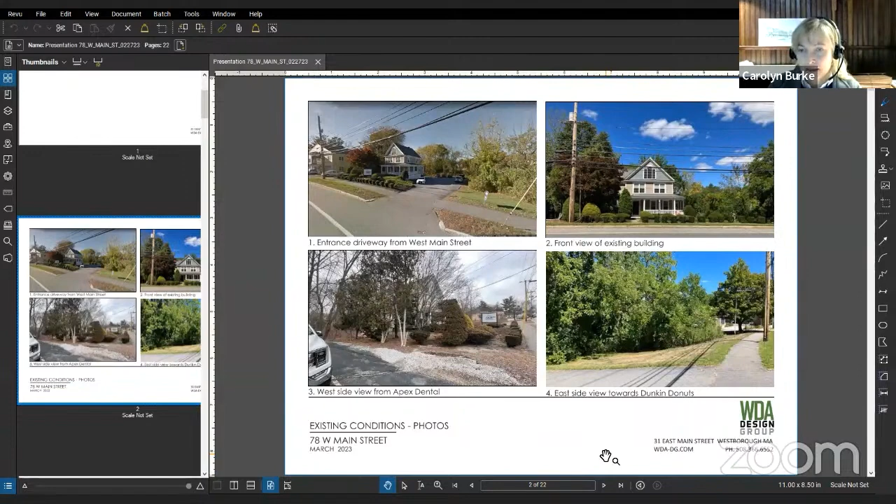I'd like to start with some existing photos as a refresher. One is the entrance drive from West Main Street. Two, the front view of the existing building. Three is the west side view from Apex Dental. Four, east side view towards Dunkin' Donuts. Fifth is the landscape view along the east property line. Six is the east elevation of the existing building.

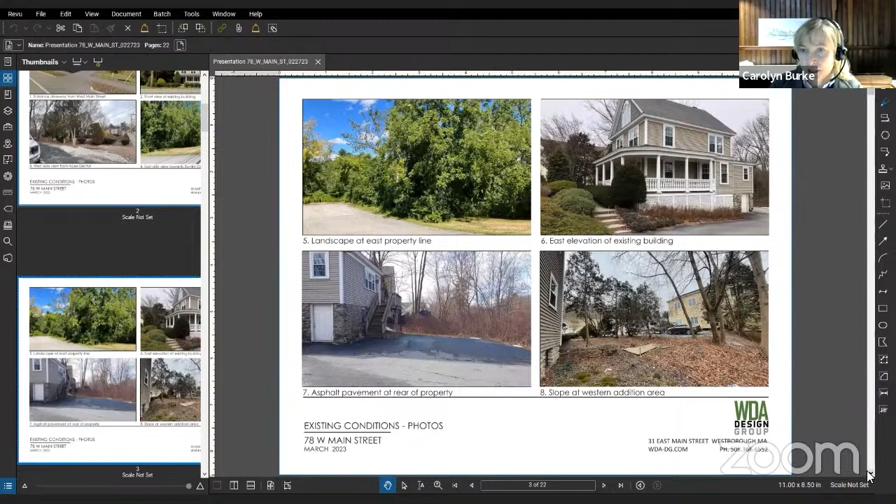Seven is the asphalt pavement at the rear of the property. Eight, the slope at the western addition area. Nine is the landscape at the rear of the property, and ten, similarly, at the rear of the property. Eleven is the view from the driveway at Dunkin' Donuts. This is our existing conditions of the building, showing the large parking area, the wetland area, and the vegetation.

And our proposed plan. On our proposed plan, we have improved the aesthetics of the rain garden, the shallow basin. We've created a rain garden, and we've added screening along the west side of the property line at Apex Dental. That screening consists of arborvitae and yew shrubs. And then in the lower area of the slope, we have some viburnum.

To address the letter responses, we have updated the zoning classification table to reflect the correct zoning. We have updated our photometric plan to eliminate spillover onto the Dunkin' Donuts area. We will request a waiver for a variance of the width of the buffer area along the east side. We've adjusted the planting plan to show tree height at a minimum of 6 feet tall.

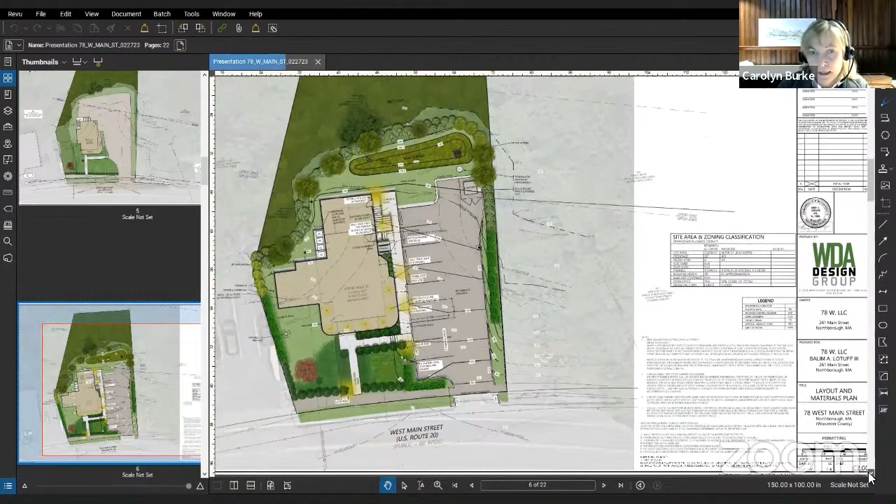We have revised our planting plan, and I'll show you some examples of the plants included in our rain garden. It consists of iris, goldenrod, New England aster, boneset, switchgrass, and the shrubs summer sweet and red sprite type of holly.

We've added the erosion control plan to the drawing set, and we've adjusted the location of the dumpster, setting it back a foot and towards the property line a foot. We've added the enclosure for the dumpster, and we've added the screen planting, as I've mentioned, consisting of arborvitae along the west property line as requested.

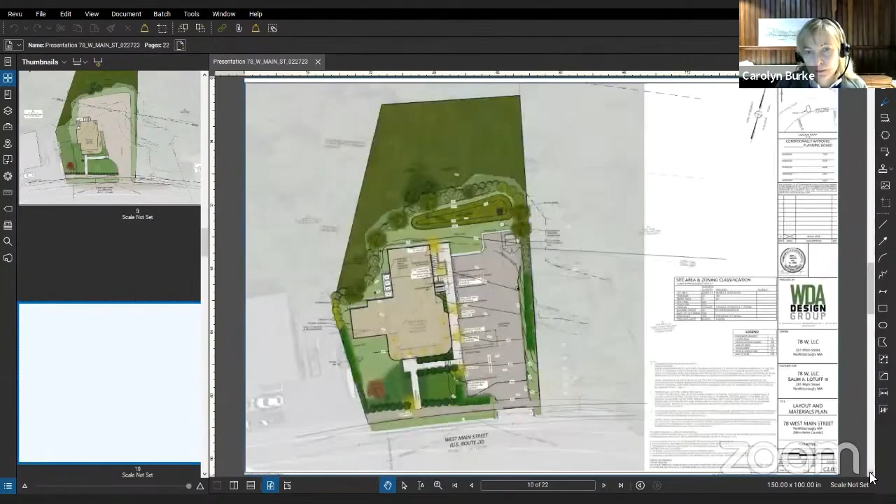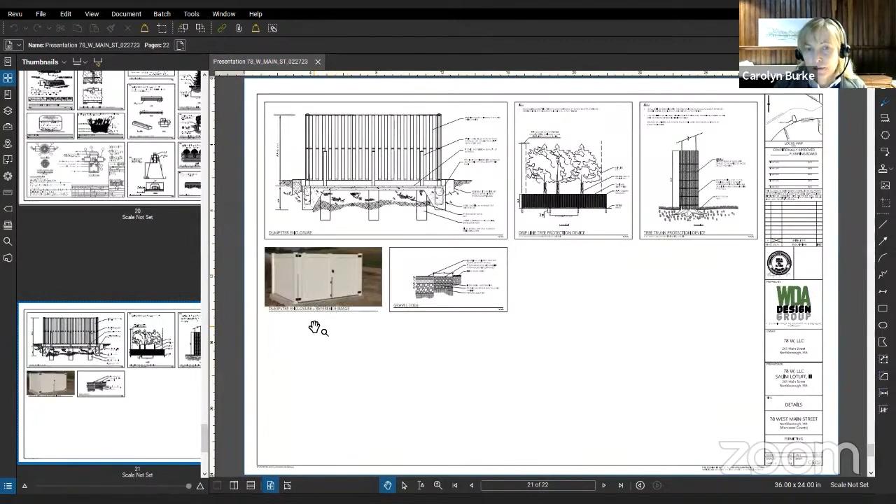And this is the updated planting plan. This is a picture of the proposed style of the dumpster enclosure, and our updated photometric plan.

All right, thank you. Are there some questions and comments? Thank you very much. Lori, that sounds like it covers your letter, your review letter.

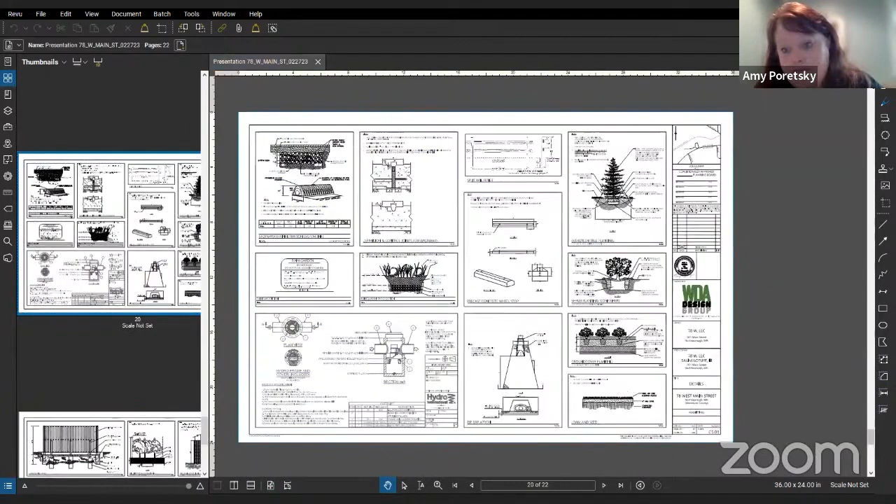Okay, does anybody else have any comments? Any board members? Maybe I do. Sure, Lisa. Okay, it's just a few things probably going back. Can we bring up the photos that you had, number 3, west side view?

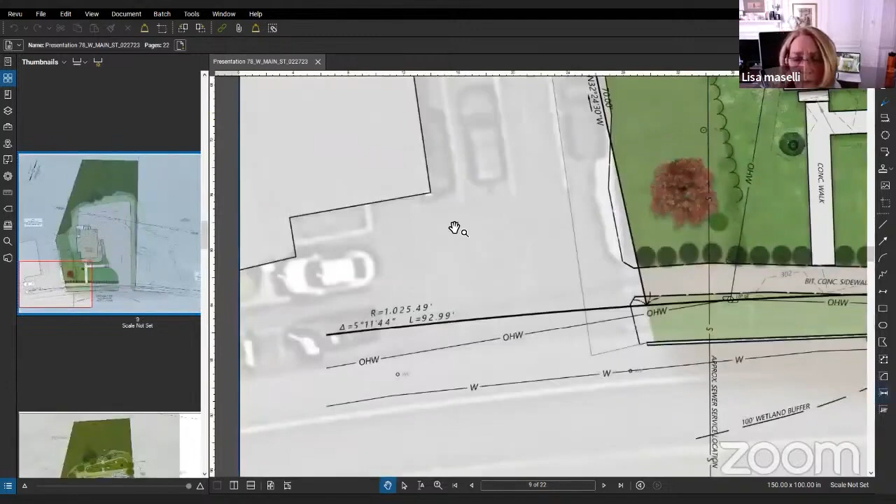It's going to be a couple questions on that, and then yes, right there. So if I'm looking at this, I'm assuming that that's snow. That would make perfect sense if it's a current picture. Is that correct, or is that just stone?

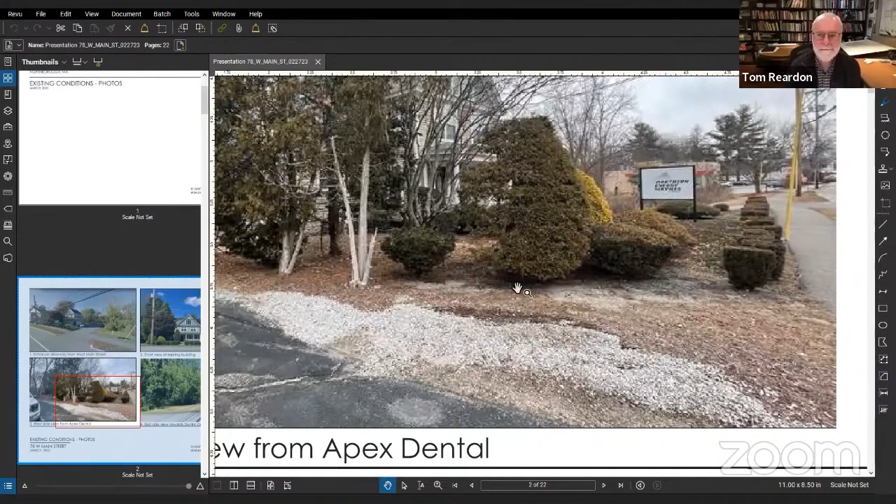Can you hear me? Looks like gravel. It's gravel. That is crushed gravel stone, put in there. Probably a new piece put in, probably to fill something up, I would imagine.

Yep. Landscaping - so just get rid of all that and do the grading, even the tree lines, check the tree lines because it's all wooded. Yeah, so get rid of all that. And then this side.

Did somebody mute themselves?

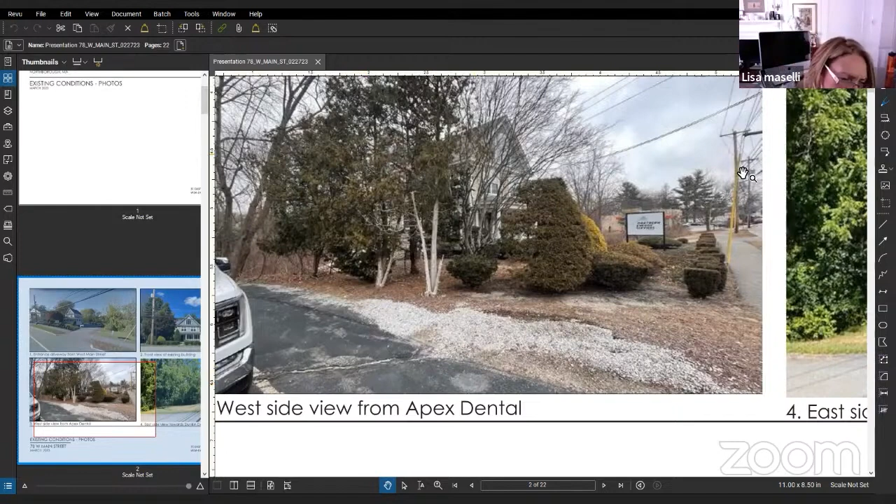Okay, so yes, this is gravel along the driveway at the Apex side. All right, so my comment starts with, because you're going to have such a close addition to this lot line, which shows pretty well here because it goes right up to that, the pavement, does it not? No, it's about 10, 15 feet away from the existing paving.

Okay, then, well, the lot line that we saw in the plan showed that there was kind of a combination of stepping over from both sides, probably to the lower right of this photograph. And that, yeah, come down to the, well, more the street side, let's call it the street side. Yes, down through there. So when looking back at the plans, that lot line seems to intermingle between both properties.

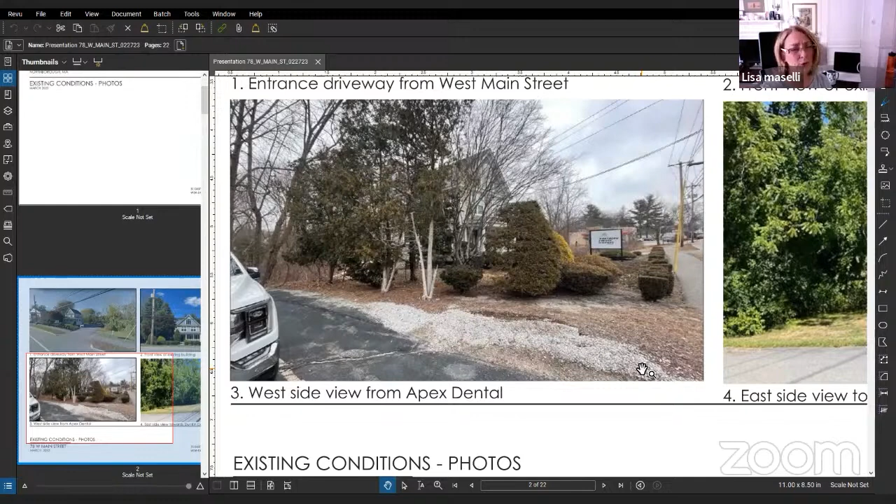And when we were talking about putting in, and I don't know if it drops, is it flush? Is it the same elevation on the driveway and the landscaping area? It is in the front of the building. They are the same elevation, but as soon as you turn the corner and head north, the site drops off 6 to 8 feet to the back of the property.

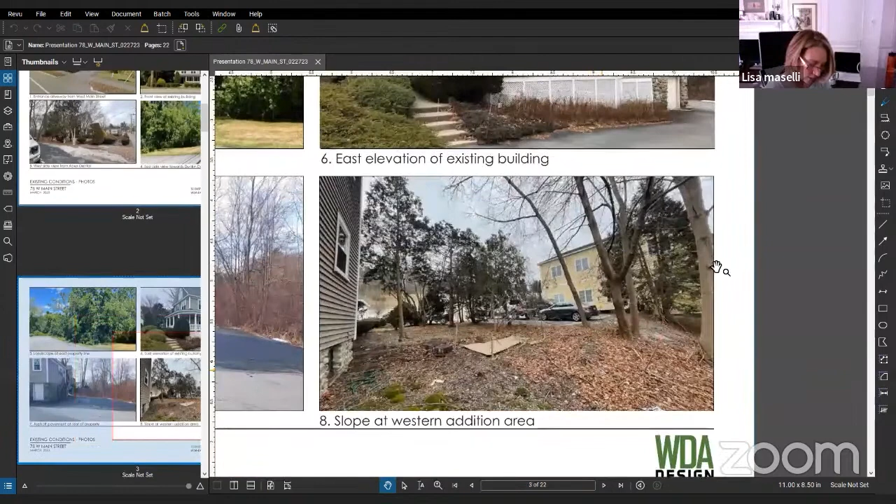Okay, and as it drops off, that's the area that we were actually starting to talk about, how that will affect whoever's living in the house with lights and such from the driveway. How, and for the tree line or for the fence line or whatever, there was concern that the fence would be knocked over with snow removal from Apex and push against it. So

Plantings were put in instead to create some of that buffer. Am I correct? That's correct. And there will be no fence at all in that area. We're proposing to use that, correct.

Arborvitae, yes. So what's the height of the arborvitae that's going to be put in there? 6 feet. It's 6 to 7 feet.

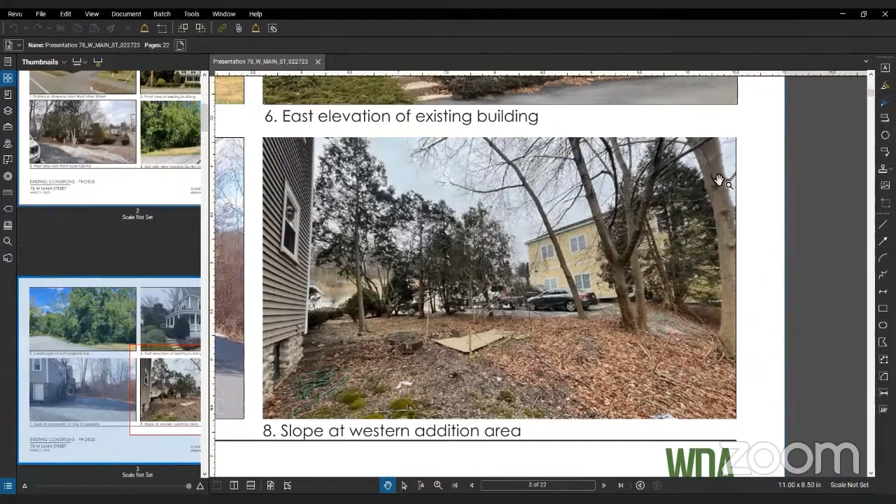And I know it's kind of a crazy question, but again, going to a tree symposium, they were discussing putting in different varieties as opposed to one in a straight line, because some things die and just the look of having some dead and some alive doesn't always please people. So is there a way that you can have a selection, not necessarily just the same arborvitae going down that line, to create just a little bit of safety for life?

So if the goal is to have effective screening, I think that we think the best option is to use a good cultivar that's going to provide screening within this limited space. And we've selected a variety that will do that. To create the screening and the barrier as you have requested, we believe one variety is the way to go. We have a lot of diversity. We have a robust planting plan at this stage throughout the property.

Yes, that's not going to help our lighting at all, though. So,

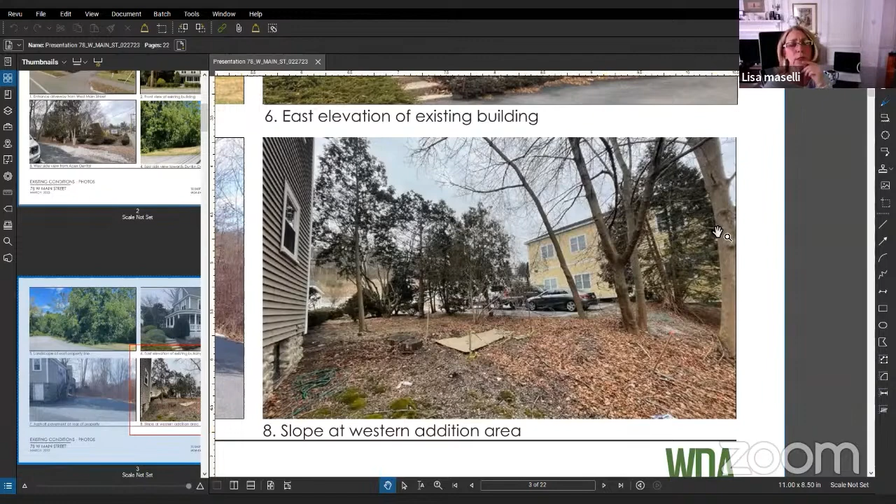So you're saying you're matching it. If I'm looking at your drawing, the darker circles coming—not this one necessarily, but the darker circles that come to the face and to the west going up to the north. Yes. Not that.

Can you show the proposed drawing? There you go, that's the proposed one, yes. So what we're looking at, where it doesn't have circles, that's all arborvitae? This is arborvitae, yes. And then the ones with circles, that's viburnum on the slope.

So in essence, Lisa, they are doing what you're talking about, but the masses you're talking about in that symposium you went to, there's a certain place and time for that. In this case, where they're trying to do screening, that's not the right spot for it. In this situation they're trying to do a screen, and what Carolyn's proposing here is actually correct as far as what they're trying to do.

Well, I'm not questioning that or even the line of it. I'm just saying that sometimes you'll get a row of them and some will die. And I know that there's more than one variety in the family—there's more than one, is there not?

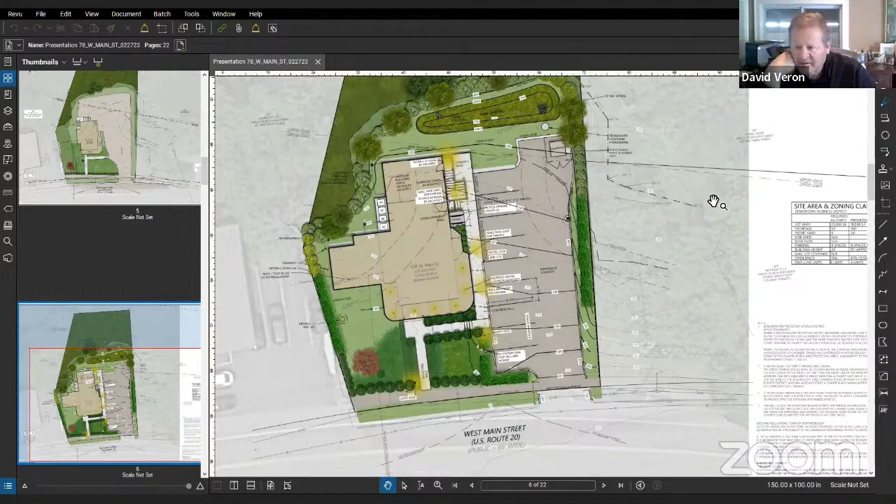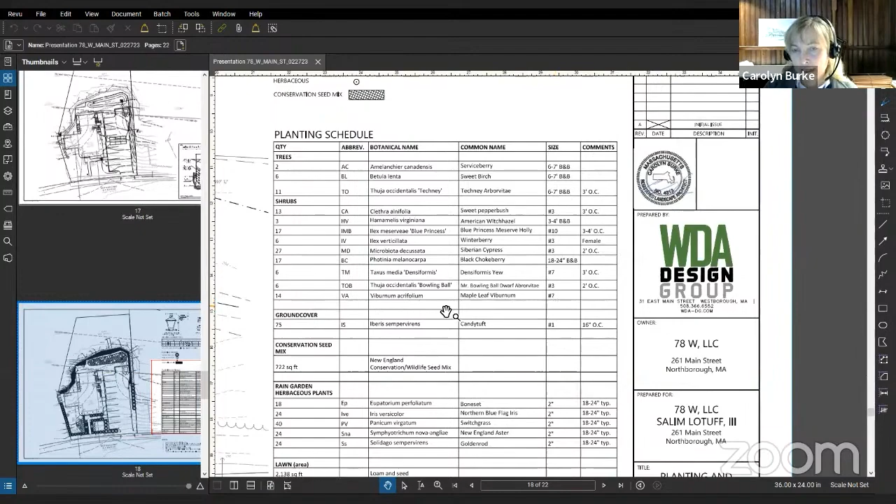Let's flip to the planting plan. Those are 7-gallon. In terms of height, how high—4 feet, 3 feet? So 7-gallon size can really range in height, depending upon what's available to the landscape contractor. But what's the range, from what to what? I would say 3 to 4 feet.

And what do you do about the perpetuity part of that side, that'll have a lot of activity with the driveway next door? How is it going to be?

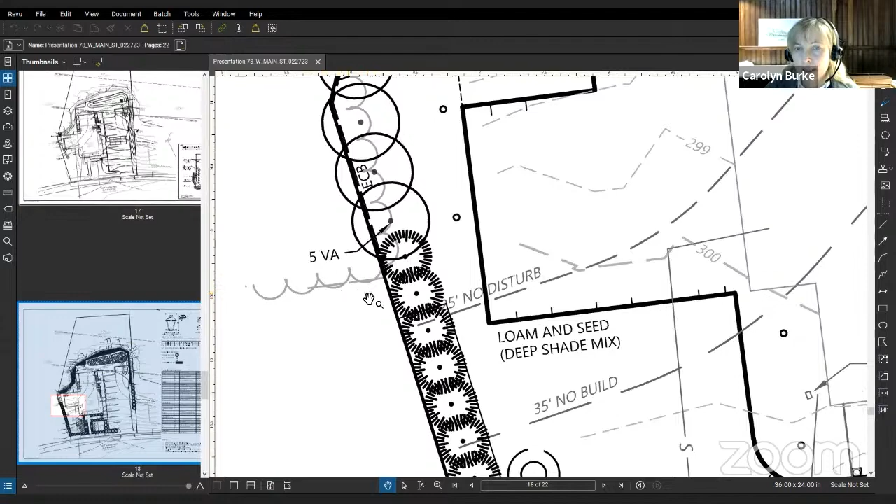So the driveway comes down, you can see here, this is basically the edge of the driveway. The arborvitae is going beyond the edge of the driveway. What's that got to do with perpetuity? I'm sorry, I don't hear you.

Perpetuity is my concern, because you've got a lot of activity that'll be happening in the driveway through the seasons. How are these lines going to be kept in perpetuity and kept up as landscaping goes? I would assume if we're going to put it up there for a buffer, we want to keep it, right?

Yes, well, the proposed viburnum is a native species to this type of environment and is naturalized in these conditions. It will do well on this slope in this condition over a period of time.

I'm sorry, I like those—I'm not talking about those, I was just talking about the arborvitae. Yes, they're difficult to keep up over a course of time. There's a lot of death that happens with them.

There can be a comment or condition added to this special permit granting authority to keep the plantings in perpetuity. There usually is, but we can add that comment. All right, I think that's a great idea.

Could we also have the design review committee observe the planting in perpetuity? Just like the planting has got to exist in perpetuity—I mean, who's going to oversee this?

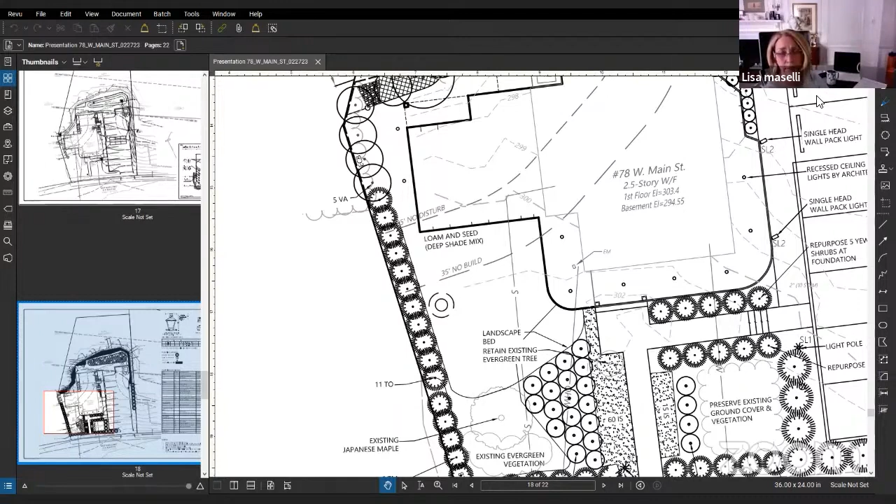But then I think what is proposed is an appropriate screening. If I may, we could just have screening in perpetuity and in proper condition. Right, because they could go back with a fence. Yeah, Bob's got this figured out. If I may—sure.

It's in the bylaws, in more than one place, that when a special permit granting authority issues a special permit, the maps and plans, including details like plantings and fences, are required to be maintained in perpetuity. We've had cases where plantings were planted over the course of 30 years, became overgrown, and the property owner removed them. We had to go back and require the property owner replant those trees because they were required as part of the screening plan for that original site plan. So in terms of who monitors it, it becomes a zoning issue, and it's up to the zoning enforcement officer to see that these are maintained.

Thank you. Thank you. Thanks, Bob.

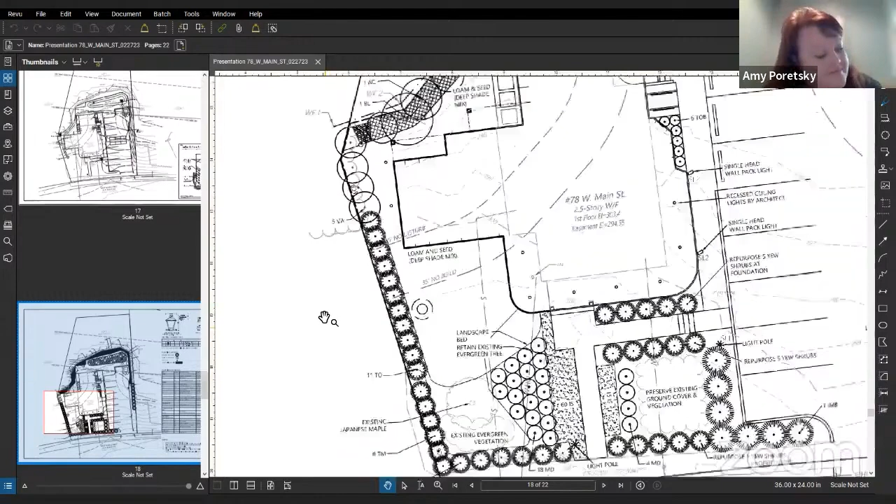Okay, any more questions? Yeah, I have one. Can we go back to the colored site plan, please? I just wanted to make one comment.

Lori is having trouble when she comes off mute, everything's like in stereo and she can't hear anything. So she's watching, but she can't say anything. I just wanted to let people know.

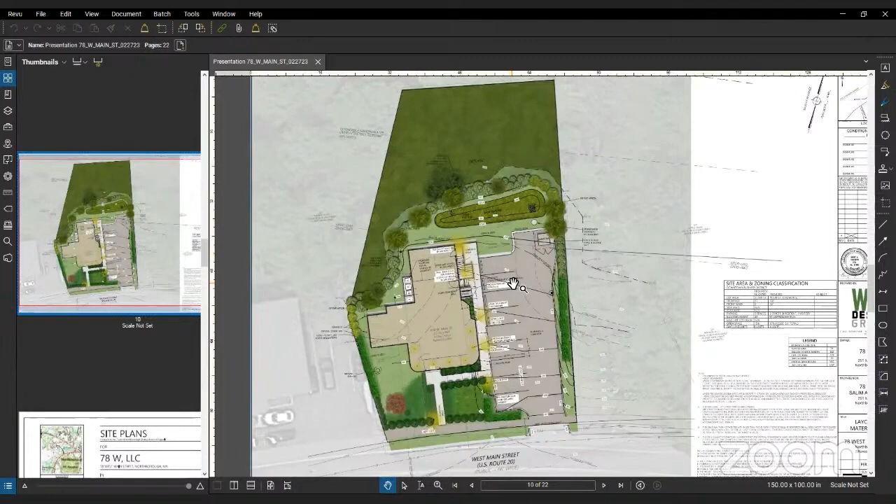So the side yard setbacks are 0, is that correct? Yes. So if Apex decides they want to build right on their property line, what happens to those bedrooms? Is that a fire rated wall? Because we'd be 6 feet from a building? Or would they not be allowed, and this stops them from doing something they want to do in the future? How does that work?

Well, if they built on the property line, we'd still be more than 5 feet from the property line with the proposed addition. We can't predict what Apex might do in the future. Oh, so they would be allowed to do that and everything would comply? Yeah, correct, according to zoning, you can build up to the property line. Right, but I think that's a lot with commercial, when you have bedroom windows needed for egress. I was just curious how that plays out. Well, our proposed addition is more than 5 feet from the existing property line. Okay.

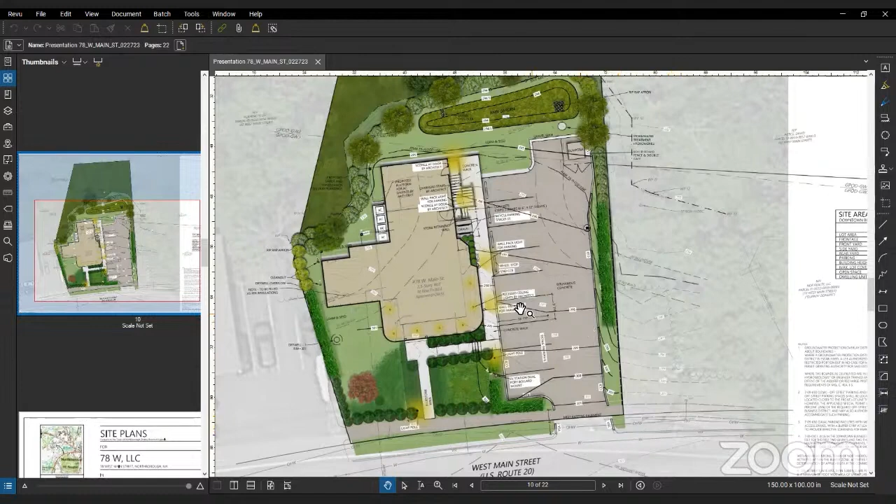And then the other question is, we've got, and I don't know what Bob has, but normally when we have perpendicular parking with 18-foot cars, we have a 24-foot drive aisle. This looks like it's 16, which is shorter than the length of some cars or trucks. How do you back out with only 16 feet behind the car? Well, I think the minimum allowed is 18 for this type of... okay, well, it's 16. I don't know what the dimension is here. Look at the one closest to the road. I scaled it out at 16 feet on the PDF, but you guys can check that if you want. Right there, that space, from the end of that. If that's 18 feet on the stripe, you can see that the space behind it is shorter.

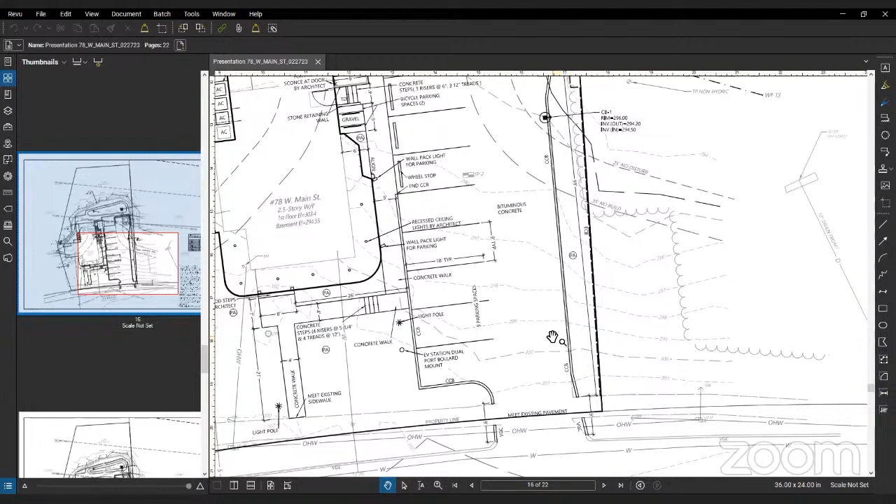And the other question is, if you look at the back 4 spaces, they have tire stops, which is good because they're 2 feet back from the sidewalk so the sidewalk works. But the front 4 spaces don't have tire stops, which means when the car pulls in 2 feet over the sidewalk, you're only going to have maybe 3 feet between the car and the building. It seems really tight, especially when you come in on a curb cut that's maybe 22 feet, and the first thing you hit is the back of the car parked in that space when you enter the site, because the car pops out into the curb cut. I don't know how that works. I've never seen a 16-foot drive aisle with an 18-foot car or parking stall.

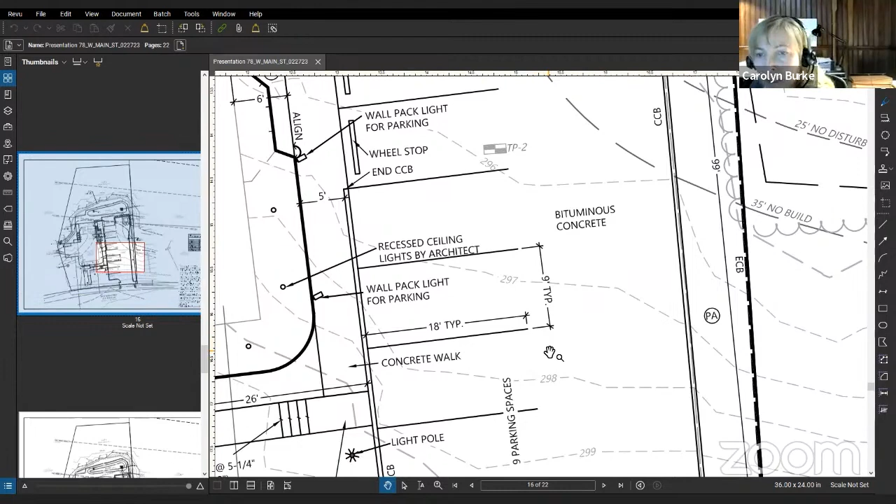Anyway, that's a question, okay, we'll look at that. And then the snow removal, where's that happening? Is that happening in the back? I just wanted to add it. We will look at that dimension, but I believe it is 18 feet backing up. Okay, well, maybe the scale's wrong. Okay, yeah, well, just put a dimension there, as long as we adhere to it, that'd be great. It is 18 feet. So snow removal can occur along the east side, or it can occur in this area between the end of the parking and the rain garden.

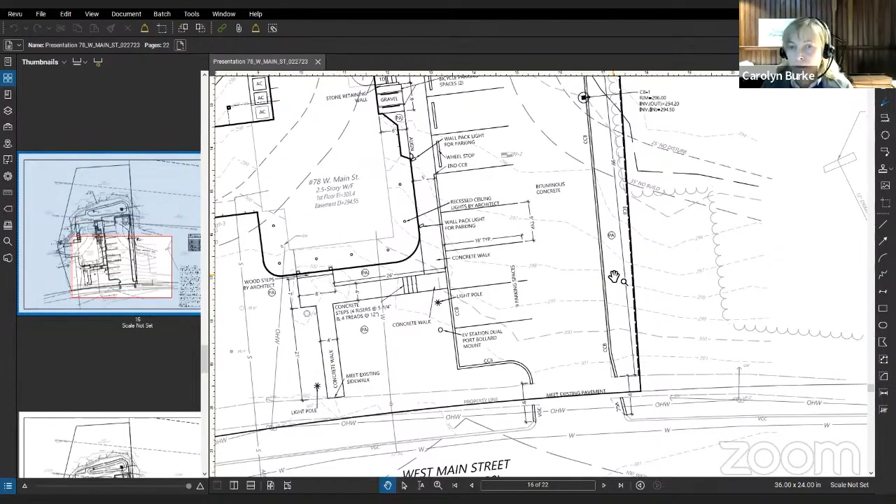Are we planting on the right-hand side? I thought we were planting on the right-hand side. We are not planting in this zone at the front, the zone further where the cursor is shown. Right, but beyond that, we're planting all the way from the second parking stall all the way back. Is that correct? Let's go to the planting plan.

Or just go to the site plan, it's shown there. Everything's kind of there. So yeah, we're planting all the way except for 3 spaces, starting basically at the 4th. So we have this zone, yes, and we have this zone.

So I guess if I'm plowing, and Dave would know better than me, I'm going to push it all to the back. That's the way everything slopes, and then all that salt and sand goes through the rain garden and into the wetlands, because that's the natural terrain.

And then one last question, and I'm not involved in this, but there's a big do-not-disturb zone, and we're building a lot of building in it. Is that just a variance we're getting, or how does that work? Yes, there's a variance. The existing building is in the do-not-build zone, so we are asking for variances and special permits.

Okay, I just wanted to make sure. No, I understand it's pre-existing non-conforming. Usually you're not allowed to worsen those. But okay, that answers my question. I think that's all I got.

Thank you. Okay, I just had some comments. Do we want to come back and double check the driveway calculations, or did she answer your question? Well, when I scaled it, it was 16, but maybe there's a different drawing. Okay, we can put a comment to double check. Just make sure it's 18 minimum and then you're done.

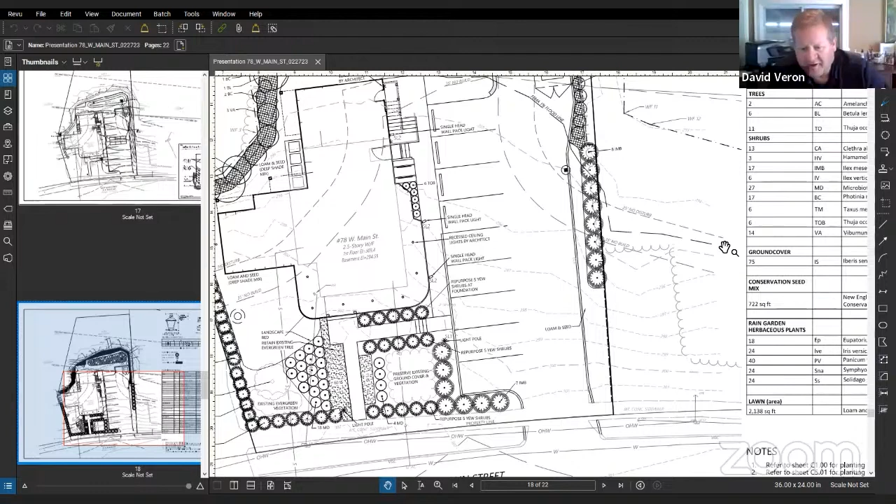All right, to answer your question on the snow: for pushing down and going to the right, there should be enough room to push everything straight down to the left of the dumpster, going towards the rain garden, and any overflow will go right next to the dumpster and to the left of it, along the right-hand side there. Then when the cars are out, they should be able to either push to the left over there or turn around and go back towards the road, probably occupying a little bit of the spot, or the best thing would be again to the left, down towards the rain garden up in there. That would be the spot for this. Yeah, that makes sense.

So in your opinion, you feel there's enough? Yeah, that should do, there's enough. It's just all near the wetlands. That's the only point. You go back a little bit over to the right. But it's a smaller lot than what it was, but it's not huge.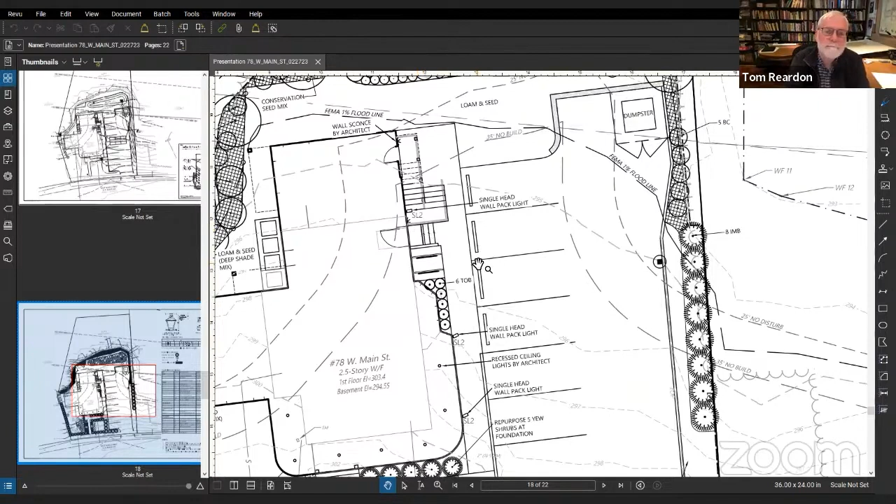The stairs on the floor plans don't match the site plan. I'm not sure which one they're gonna build. If you look at the first floor plan, the stair comes out perpendicular to the back, and on the site plan it's a switchback. Do you know which one is going to be built, Tom? I see that they've moved the platform and made it an L-shaped plan. Either one will work. Probably the site plan gives them more access to the basement level. There's an existing door there shown on the site plan, so I can modify my stair. Okay, thank you.

Any other questions, Dario, on the design? No, I'm fine, thanks. Okay, so we've reviewed the design and we've also gone over the landscaping. Is everybody on board with the landscaping the way it is right now? Sounds like it will be monitored in perpetuity. It sounds like it's a buffer, at least to me, between the house and the business zones next door.

Is everybody ready? We're not going to take an official vote, but we could write a review memo saying that we've reviewed the design and landscape at 78 West Main Street and have no additional comments, unless anyone has a comment they'd like to add to the letter.

I'm fine with all the landscaping. I forget, is a 3-foot sidewalk—does that meet code where the cars would overhang? Or does that not meet code? This is not a 3-foot sidewalk, this is a 5-foot sidewalk, with a 2-foot overhang of a car going over when it hits the curb.

Most cities don't allow that. We just did one in Weston and we did one in Sharon. They said you have to have 4 or 5 foot clear, so we had to have a 7-foot sidewalk because of the 2-foot overhang. People drive their cars till the tires hit the curb, and then it becomes 3 feet usable. I'm not sure what our codes are.

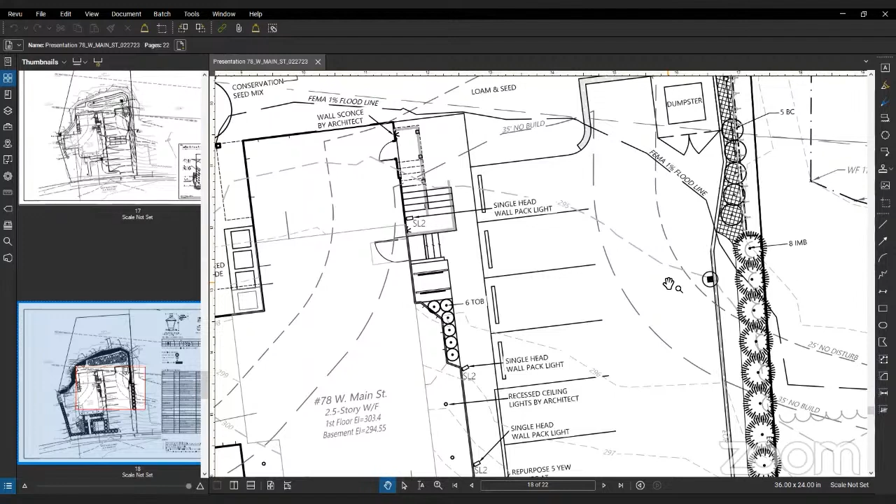Whatever the code is, I don't know. It just seems narrow. Bob may know that, or Tom knows that, whatever it is, or Carolyn would know. Okay, so make sure the sidewalk meets code.

That's all. Should we also have, make sure the driveway access meets code, since there are a couple questions? Well, it should all meet code—hopefully you don't have to state that—but yes, those are things we're looking at that appear that they may not, so I'm just bringing them up. I think erasers are a lot cheaper than jackhammers.

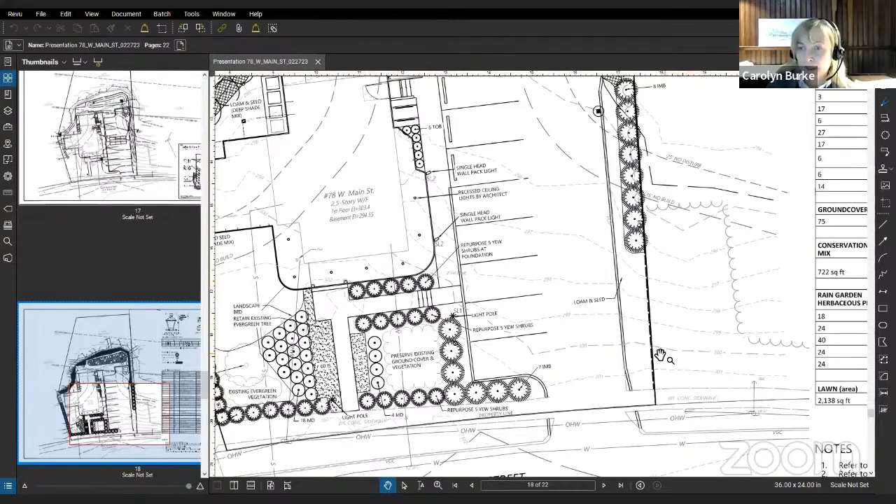Okay, good point. Lori, she's busy, but I just want to make sure someone's going to check that. I'm sure Fred does—Fred is actually on vacation this week. So we are going through site plan review on this, where any of this would be checked.

Okay, is that at ZBA, or who does it? I'm not sure who it's coming in front of, the ZBA or the planning board. We haven't gotten the application yet. Did we actually get an application either? I haven't seen it. The ZBA application has not been submitted yet, but it's been completed. We're going before the ZBA next.

Oh, this is the first time I think we've ever done one without an application at design review. Is that unusual or is that a new standard? My understanding is you could start the process with design review while you're working with the ZBA. But you've been on here longer than I have—have you had that happen before? Well, I believe Lori said we could start the process with the staff and then design review, and do it in conjunction with the application that's being worked on. All right, so it's a new way of doing it. All right, I just wanted to check.

It's my understanding that was the typical process in the past, but I've only been here a year, so I can only attest to what's happened recently. I think it's helpful for applicants to come to design review first, so that by the time they're before the special permit granting authority or the ZBA, they have a project that's further advanced. Well, I like that idea.

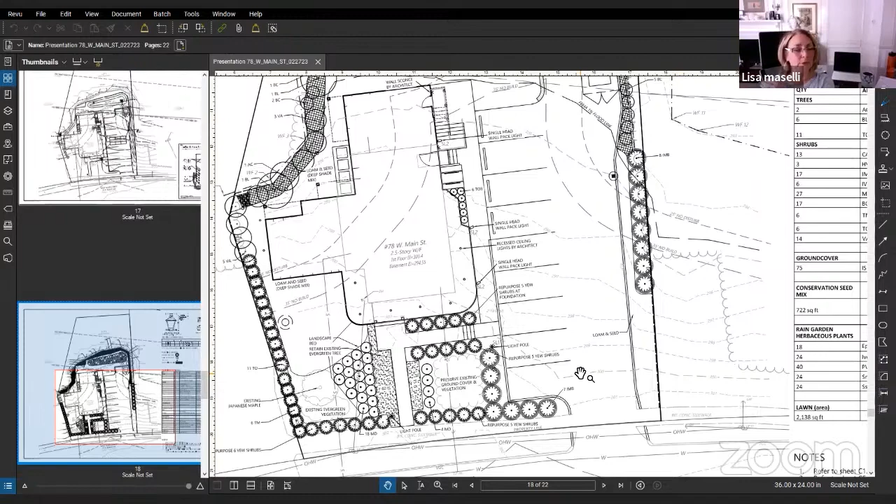Lisa, I think those are great comments and I want to swing back to it, but I just want to close up this application first, and then we'll go back to that so they can move on. But I do think it's great input. Is there anything else for this application that we want to add?

I was going to suggest we write a letter saying we have reviewed the design and landscaping of 78 West Main Street, with a comment about adding sidewalk buffers. Is there anything else we want to add? And check the driveway code, sidewalk width, and the driveway width. Those were the notes I wanted to say.

I'm changing the letters that go forward to say that we've reviewed the design and landscaping, because we don't really approve the whole site plan. In the past, some memos went forward to the special permit granting authority saying that design review approved the site plan, but we don't go into all the aspects of the site plan. So I'd like the letter to say we've reviewed the design of the building and the landscaping.

Does anybody have any comments to add about that? Do you say that it conforms with the design guidelines? I mean, do you make any definitive statement of whether it's consistent with the design review guidelines?

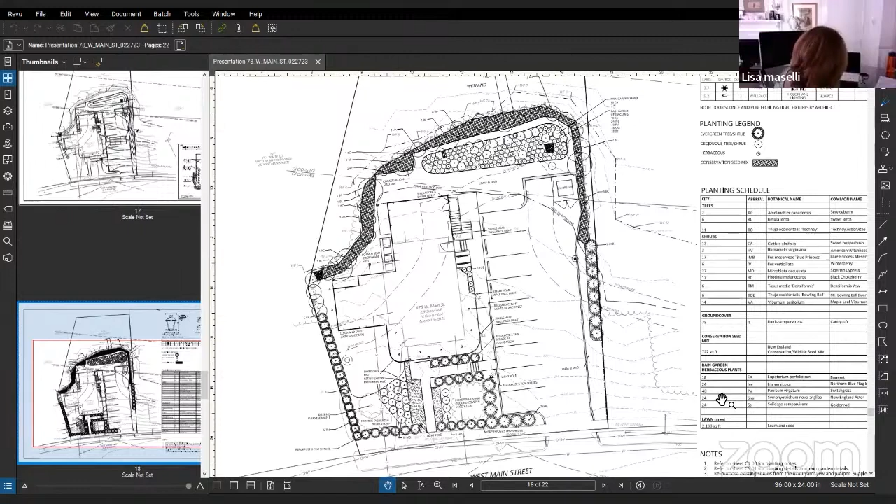So you don't draw any conclusion from your review, you just say you performed the review. Right, correct. And all our questions were addressed in the review and answered. And the review is based on the design guidelines.

Correct? No, you don't implement the design guidelines? I'm trying to understand what you now see your role here and what kind of conclusion you come to, or is it just a process statement. I was making a process statement, but in the future, I'm going to go back and look at all the design review guidelines, but then it's going to get a lot more technical.

I mean, it was a building that was there before. I would think with a new building, we'd go back and review the design review guidelines to make sure it meets all of them. But as it was a current building, since it met the design to begin with, I didn't want to go back to the design review guidelines and say, okay, your windows are too small or you need shutters here or there. I felt that was too detailed since it's just an addition to a building that's already there.

I agree, Amy. Because then you might end up with more than you are looking for, if you have to change your whole design. But like to Lisa's point she was getting at before, there does need to be continuity downtown, and we do need to make sure it all fits the design review guidelines. But for an addition, I didn't think we had to go that route, as long as it matched what was there and met what we were looking for.

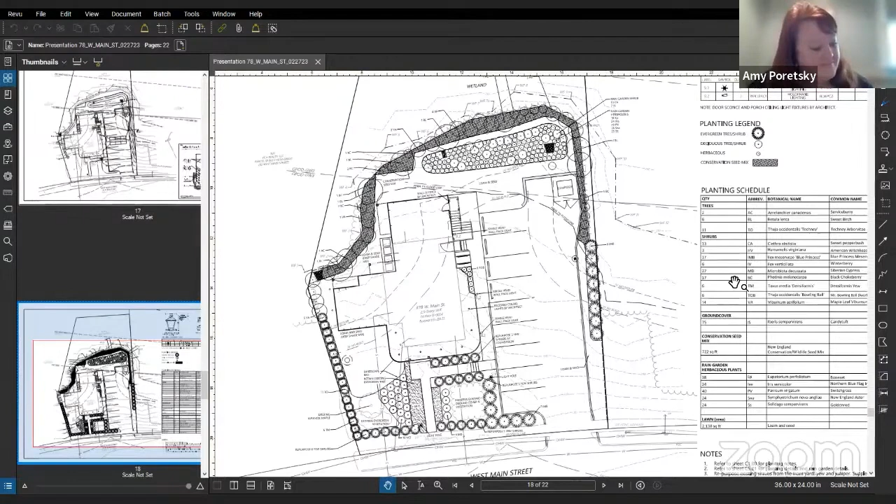Does anybody have anything else to add? Well, I think you're right, I mean, it is about the process. We're not an authority, we're just giving a look at it. Okay, I don't have anything else to add. Okay.

All right, okay, so should we just take a vote that we agree with the letter? And one more thing I did want to add, actually, is I did review the plants in the rain gardens, and 2 of them said they were toxic if someone ingested them. I'm sure everybody's yard has plants that are toxic if ingested. Just if they were a family with kids, it said the boneset and the goldenrod were toxic if ingested, so I didn't know if you wanted to stick with all the others and leave those 2 out, but it's totally up to you.

Should I make a motion? Oh, it's up to you. Does anyone have a comment? I don't think we need to personally. I'm sorry, Lisa, I can't hear you. I don't think we need to vote, I think the letter's fine. Okay, everybody else think the letter's fine? Yes. Dave?

Dave, you're on mute. You can give us a thumbs up if you think it's fine. There we go. This is nuts.

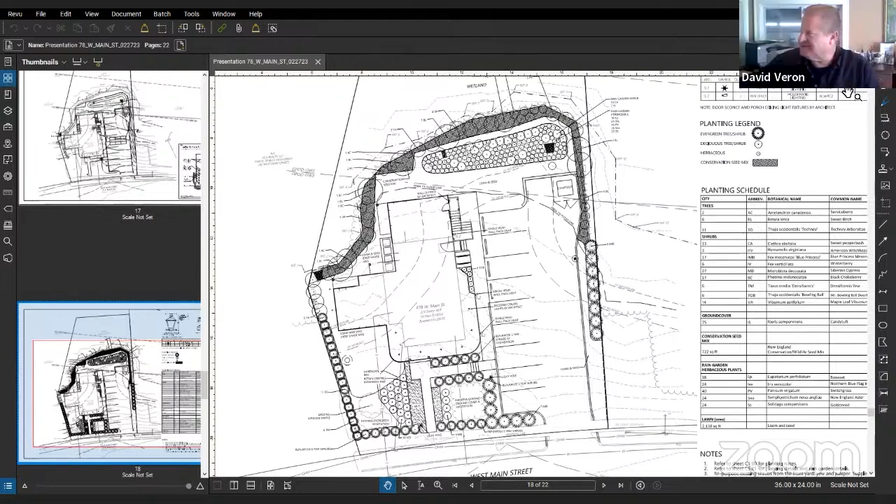Yeah, that's fine. Okay, thanks everybody at 78 West Main Street. Good luck with your next steps. Thank you very much. Thanks for all. Thank you all.

Next on the agenda, I wanted to get to the minutes quickly because I'm not sure we're going to have time for the next application, since we all have to jump off at 10. I just want to make sure we reviewed the September 8th, 2022 minutes.

Does anyone have any more additions? It looks like they added the motion back into the minutes that Dario had made back then for 56 Hudson Street. I double checked it, it looked fine. Does anybody else have any questions on the minutes from September 8th, 2022?

I do not. Dave and Dario, any questions with the minutes? Dario? I don't know if we lost them.

I was on mute that time. I was pretending to be Dave. I'm fine with it, sorry.

Okay, can I have a motion that we approve the September 8th, 2022 minutes? So moved. Is there a second? Dave seconds. All right, this is too much fun. All right, so now we have to vote.

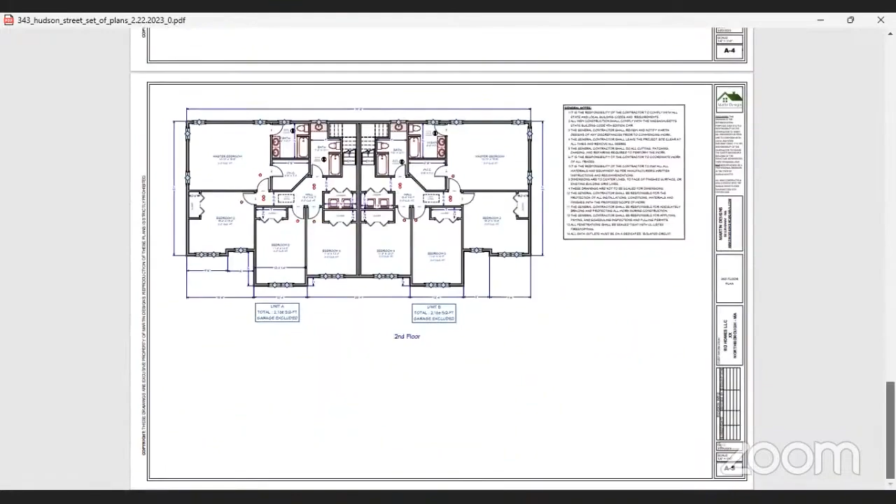Amy, I'm just going to speak for 2 seconds. They gave us a site plan at the end, it's the very last sheet on their submission, so it shows the building being torn down and where this one is being located. The only thing it doesn't show, which would be really simple to show, is the buildings on the 2 adjacent properties. The drawing by Cornerstone shows the existing dwelling, this barely overlaps, but they did give us all that except the actual buildings. They showed all the adjacent lots, they didn't show the buildings, so if you want to see those in context. Most of the stuff is here from what I could see, but I agree that's a pretty simple thing for Cornerstone to do as well.

I agree, Dario. To add on, one of the things we do here is look at the landscape, the fencing, we look at everything overall. We don't do it in pieces, we look at the entire project and how it also looks with the surrounding homes. So we're looking for the whole project as an entirety, and what it's going to look like as a finished product. We don't do piece by piece by piece. It's present everything, and then we go forward from there.

If I can interject, we're planning on coming back before you again. Today the purpose was just to have you take a peek at the building itself, and we do plan to come back one more time. This time when we come back we'll have a representative of Cornerstone with us, and we'll show you more of the area itself, and we'll coordinate between Cornerstone and our architect here. We'll show the landscaping, the fencing, the driveways and so forth.

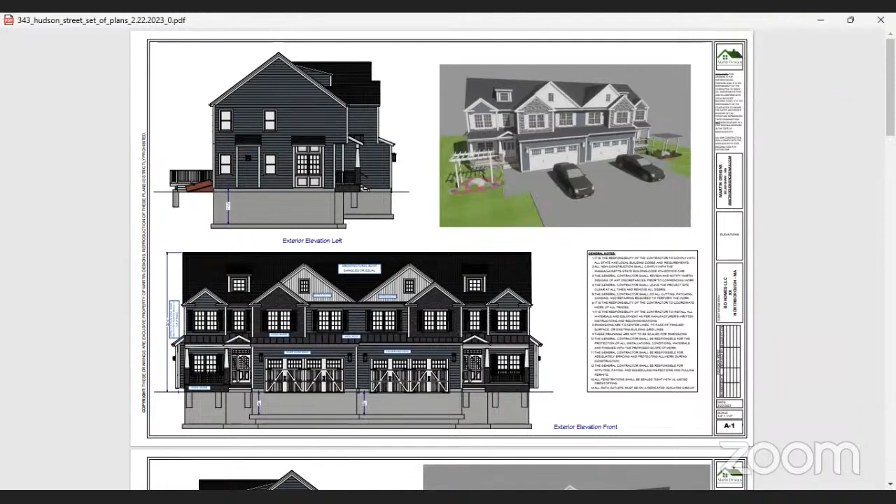Okay, it's 9:53. We're doing good, wow. I just want to, I think Lisa, I said I'd swing back to you, so we have 7 minutes. I didn't want to cut you off with your discussion about downtown. No, I appreciate it.

I find that we keep running out of time and we haven't been able to really discuss stuff. I don't even think we've finalized - has the design review guidelines actually been finalized? Do we actually have a booklet now that we give them? Yep, it has been finalized. It was voted on at the planning board meeting and it was accepted, and it's listed on the website. All right, so but if we want a printout, we can request it from Lori and Michelle. Okay, I'm old school, so I think I'd like a printout, because sometimes you can't get these computers to work the way you want. Right. But we knew they would be on that.

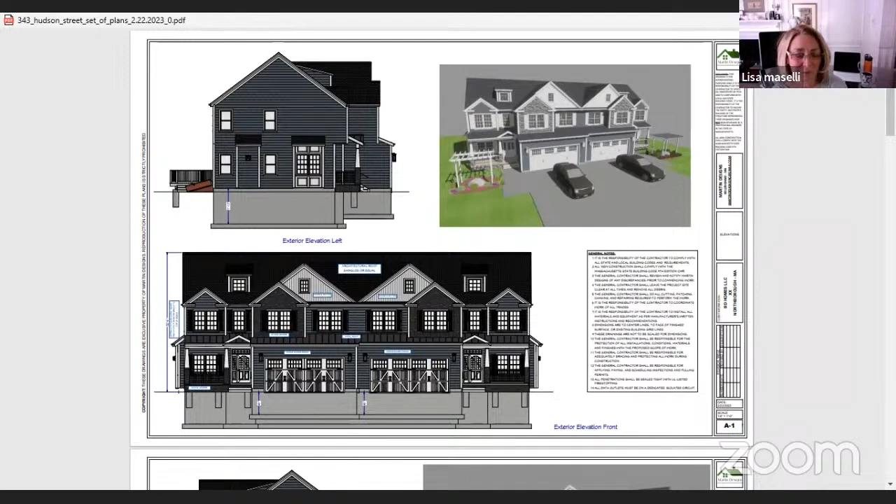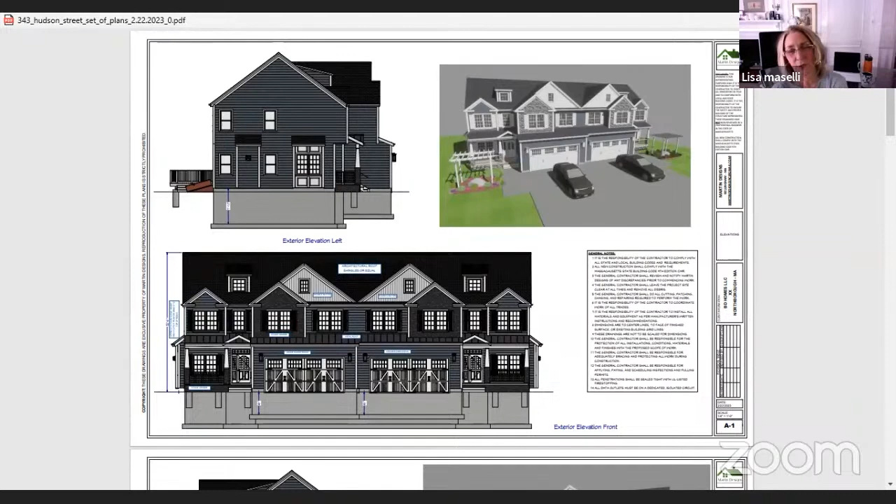I think we lose sometimes - you have to refer back to some of the things that have happened, talking about the look of downtown and what we want it to look like, what's the theme. Every piece of land seems to be in its own standalone theme, certainly in that area. Can we get a consensus on how we would like to do this instead of always having this guy really wants to sell his land and he really wants the highest and greatest amount, and then we push everything to the edge.

And at the end of the day, look what we have left. 7 Monument Place has not done anything. The landscaping looks terrible, they haven't even put in the rain gutters on their building. How many years do they have to be there to make their money to get that back the way it's supposed to be? It's a sad area down there and we just keep adding to it. So that's my opinion, but I'd like to have some more people talk about it.

A big part of the downtown revitalization project is to come up with a vision for downtown, so that's in process. I would hate for this group to go in a different direction. I think it's important for this group to be part of that conversation and then take the guidance that comes from the consultant team and advance it at that point. We are in process, and I know it's frustrating not to know, but that project should wrap up in May or June of this year, so we will be getting that guidance soon.

Well, don't you think we should be asked as design review to put some input into that guidance? Well, we hired this consultant team to come up with a plan for us. And certainly participation at the various community forums is super important, so absolutely, I think all of the members should attend those forums and provide input.